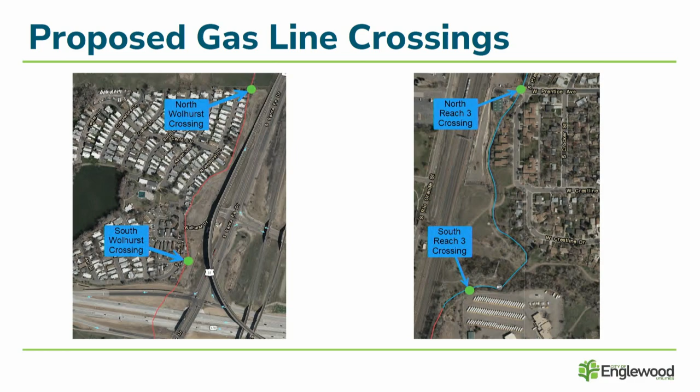These are in support of the City Ditch piping project, and we actually asked Xcel Energy to relocate these 2 gas lines in order for us to be able to install the City Ditch pipeline in Reach 3, which is in the City of Littleton. With crossings of the City Ditch, there are 2 types of agreements that we require. The first is a crossing agreement, which defines the terms and conditions associated with the crossing. The second is a temporary construction easement, which allows Xcel Energy and their contractor to access our existing City Ditch easement in order to install the new gas lines. For these crossings, Xcel Energy will maintain our required 1.5 feet minimum vertical separation between their new lines and the City Ditch, and they will also notify us prior to construction so that we can inspect the work as needed.

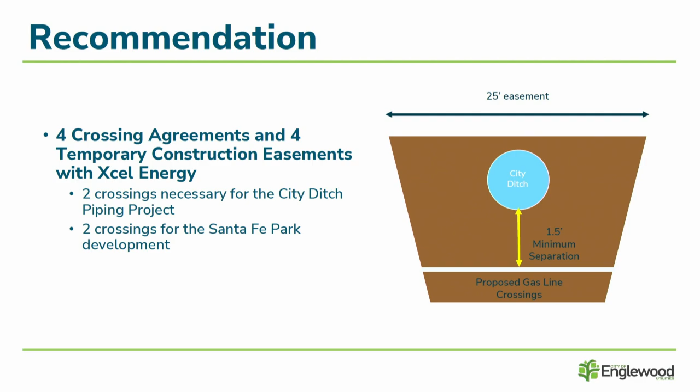Anybody have any questions? Doesn't sound like it. And yes, Stephanie, there's nothing unique about these particular easements, correct? No, these are very similar to crossings that you guys have seen in the past.

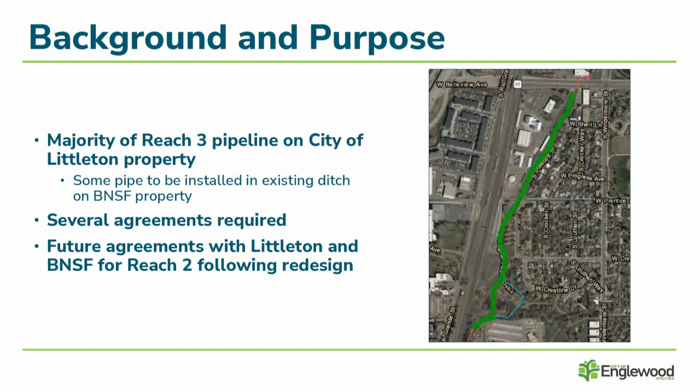There are 2 easement agreements that are proposed with the City of Littleton. The first is a temporary construction easement. This would be effective only during construction and grants Englewood and our contractor access through Littleton property and on Littleton property for construction, and also gives us a large area that we can utilize for staging of equipment and materials.

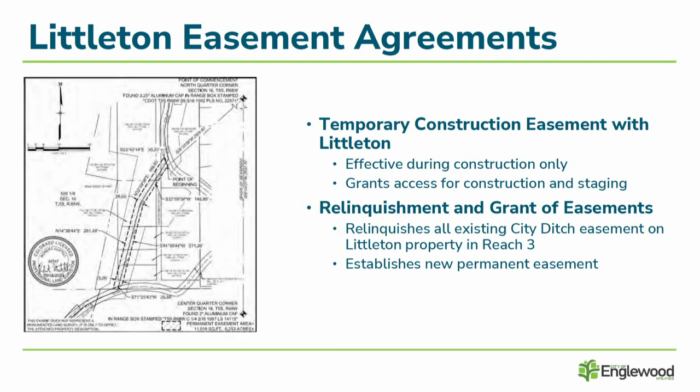The next agreement is a relinquishment and grant of easements. This relinquishes all of our existing City Ditch easement on Littleton property in Reach 3, and also establishes our new permanent easement for the new proposed pipeline location through this area on Littleton property.

Other agreements with the City of Littleton include an intergovernmental agreement, effective during construction only. It includes terms for a tree mitigation fee of $216,500, which Englewood would pay to the City of Littleton because we'll be removing a lot of trees during construction.

In order to install our new pipeline, City of Littleton also requested that we stabilize the existing City Ditch bank where we will no longer be using that existing open channel. This is adjacent to private properties, and the purpose is to stabilize the bank and protect those adjacent properties.

Littleton has also requested that we remove the existing overhead flume that conveys water over Slaughterhouse Gulch, and they want us to preserve a section of it that the City of Littleton wants to use to commemorate the history of City Ditch.

The last agreement with the City of Littleton is a quitclaim deed, which releases all infrastructure and responsibilities to the City of Littleton in this area of the existing City Ditch that we will no longer be using. This would be effective after construction, once we're utilizing our new pipeline and no longer need the old City Ditch.

In order to construct our pipeline within BNSF property, and also to go through BNSF property to install a pipeline to the north, we are requesting a temporary occupancy permit with BNSF. This will grant us the access we need for construction. It also includes insurance requirements and several fees, including a license fee, flagging services, railroad protective liability insurance, and an inspector coordinator. These fees are standard for this type of permit and work.

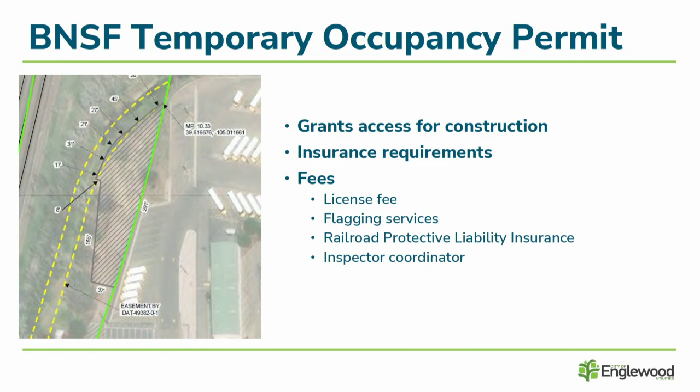Does anybody have any questions?

This is Sarah Stone, Deputy Director for Business Solutions and Engineering. I want to provide a quick comment before we open it for questions. Two Tuesdays ago, on May 27th, Stephanie gave a similar presentation to the Littleton City Council during their study session, to review the agreements and get their understanding of the construction that's going to be within the City of Littleton and what each of those agreements meant for the city. So I want to mention that Littleton is prepared to take these agreements in July to their City Council.

Can I ask a question? My question is, the part of the ditch that we're giving a quitclaim deed to Littleton for, is that in both Reach 3 and Reach 4? So Reach 4 is within the City of Englewood, so we're not giving Littleton anything in that area. But Reach 3, that's what it involves, yes.

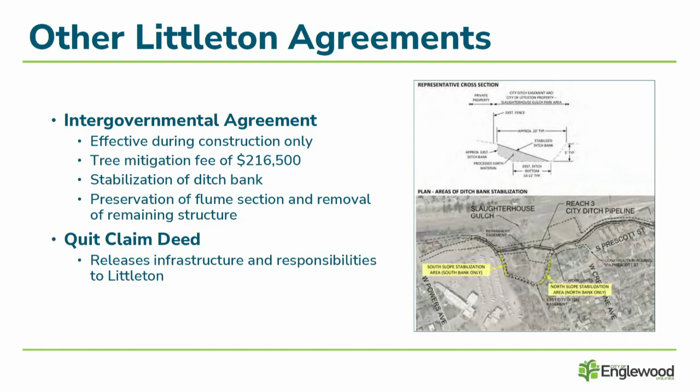They wanted to maintain that for historical purposes, is that correct? That is their plan right now. I think they're still discussing with their city council the long-term plans for it, but as of right now, it will be left open channel so that it can commemorate the history of the ditch.

Okay, thank you. And this is the same overhead flume that is in such bad condition that we'll be discussing later on, correct? Different overhead flumes. We actually have several overhead flumes for the city ditch. There's one in Reach 1 that we'll be discussing later. There's one in Reach 2, but we're not discussing Reach 2 in this meeting. That will be a future meeting as we're working on a redesign for that.

Reach 3, this is the overhead flume over Slaughterhouse Gulch Park, and that's the one that Littleton wants us to demolish but give them a piece. And then there's also an overhead flume over Big Dry Creek, just over here in Belleview Park, and that one will be discussed with the construction contract, which is the next agenda item.

And there has been some discussion that these flumes are in really bad shape. These flumes are actually in functional shape. What we've been balancing is the investment in the flumes knowing that they were going to go away, so we don't want to put too much money into them. However, Littleton did an inspection about a year ago. They did find an area of scour on one of the foundation points where the stream underneath had eroded around the foundation. Once we found that, we immediately fixed it.

5C. This next item is for the city ditch piping project construction, reaches 3 and 4. As we've discussed with Water Sewer Board before, we are working on the city ditch piping project, where our goal is to have a completely piped city ditch between Chatfield Reservoir and the Allen Water Treatment Plant. Through piping the open channel sections, the ultimate goal is to improve the taste, odor, and hardness of our water. Other improvements include sustainability, resiliency, and safety for the ditch, and an overall reduced capital investment for the utility by piping city ditch and bringing in better raw water quality from Chatfield Reservoir rather than taking as much water from our Union Avenue pump station in the South Platte River.

Jacobs has been performing the engineering design for this project over the past few years, and they completed the design for reaches 3 and 4 early this year. Soon after that, in February of this year, we released an RFP to bring in a contractor for reaches 3 and 4 construction. Reach 2, as I mentioned, is currently under redesign. The reason for that is BNSF declined to give us a permanent easement for our initial proposed pipeline alignment through Reach 2, so we're working on redesigning that section so we'll put the pipe in a different spot, or in our existing easement.

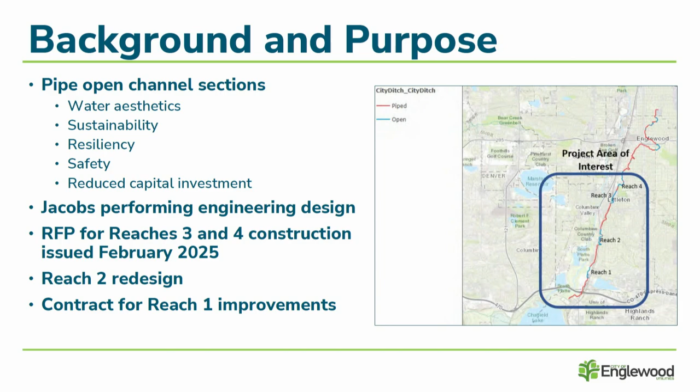The scope of work under this construction contract includes the piping for reaches 3 and 4. It also includes several supplemental items. These include cleaning existing pipe sections of the city ditch that have significant debris and sediment buildup, adding access manholes to another section of the city ditch where right now we're not able to inspect that section of the ditch because we're not able to access it. There's not enough manholes and we can't send a camera through. We also want to include in this construction contract structural improvements to the flume that goes over Big Dry Creek through Bellevue, also in Belleview Park, Reach 4. Those structural improvements came out of a structural evaluation that was completed by Jacobs.

Through this project, we will also be eliminating a stormwater inlet that currently conveys stormwater into the city ditch very close to the Allen Water Treatment Plant. So this will improve the water that we're bringing to our water treatment plant. By rerouting that stormwater, we'll also be reinforcing an existing stormwater channel to ensure it can take those additional flows. Per City of Littleton's request, we are also including the Slaughterhouse Gulch area slope stabilization and the Slaughterhouse Gulch flume demolition, as we just discussed.

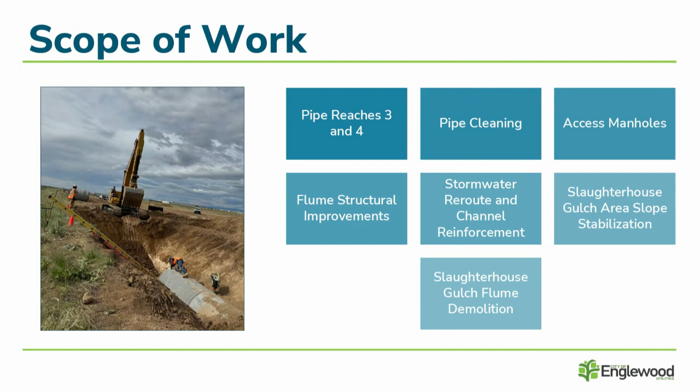For this project, we were originally proposing to execute it with a construction manager general contractor, and that was Reynolds Construction. We were working with them through the design phase and initially planned to move forward into construction with them.

Reynolds' price was for a 48-inch pipe, which is actually smaller than what we want to do for this project. We had reduced the pipe size when working with Reynolds in order to save costs. However, one of the supplemental items we included in our RFP was a 60-inch pipe or equivalent, which is the ideal pipe size to convey the flows we want through this new piped city ditch. We're able to include that in the proposed contract with HEI for significantly less than Reynolds, and their price also includes supplemental services.

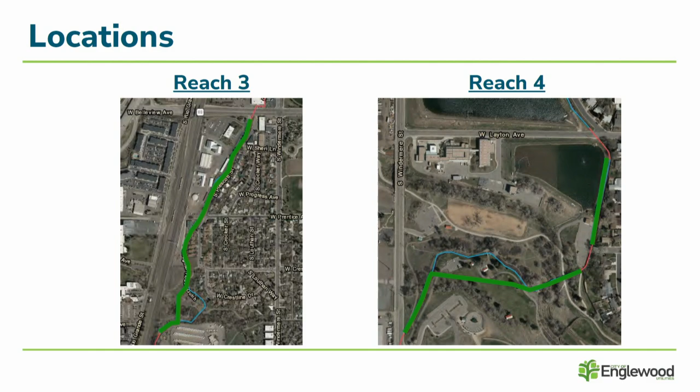So we do plan to pipe that section of ditch. However, that is also where the existing stormwater inlet goes into the ditch. So we'll be piping that area, but we're going to try to hug as close to our reservoir as we can, so that we leave room to keep some of that existing channel open to convey stormwater up to Layton Avenue. So the existing city ditch as it flows now is not going to continue, but there will still be some channel there, at least in the short term, to convey the stormwater.

I think the goal here is, from a stormwater perspective, as stormwater flows into irrigation ditches, from a design perspective you have to assume the ditch doesn't exist, because what you're assuming is the ditch is full and so it can't accommodate more water. What we're doing is putting that pipe in, but we're going to leave the ditch there so that it can still convey the stormwater away.

We don't want to make things worse. We think we'll make them slightly better. There's a larger stormwater challenge in that area that has been there for years and years and years. Our goal is to make it incrementally better, but not necessarily address the full stormwater challenges there as part of this project.

The other piece that I've talked to at least one of the neighbors about is that informal trail that runs along the fence. That's essentially where the pipe is going to go, is where that informal trail is. And then we're going to move our fence such that the pipe is within our fenced area. So that informal trail will actually end up going away.

Item 5D. Okay, last one you'll hear from me on. So this is for our City Ditch Reach 1 improvements. City Ditch Reach 1 is located in the city of Littleton, southwest of Santa Fe and Mineral.

Majority of the ditch in this area has already been piped by developers, but there are a few remaining open channel sections. That includes a forebay area adjacent to our McClellan pump station, an overhead flume that conveys water over Dad Clark Gulch, an abandoned Parshall flume that we no longer use for measurement but do use to convey water through, and a box channel installed by one of the developers, but the top of that box channel is an open grate and isn't fully enclosed.

In addition, we completed a structural evaluation on the overhead flume over Dad Clark Gulch in this area, and there are also several structural improvements that are necessary on it.

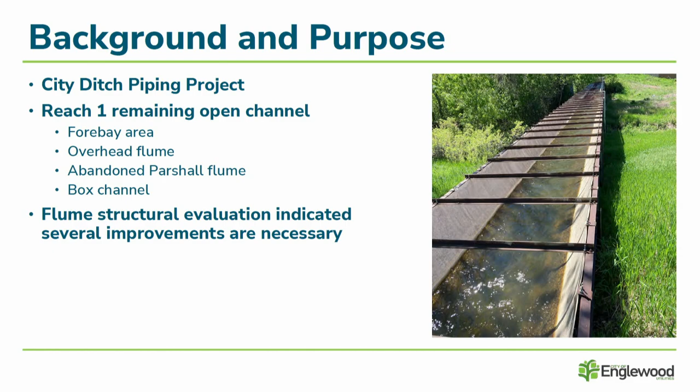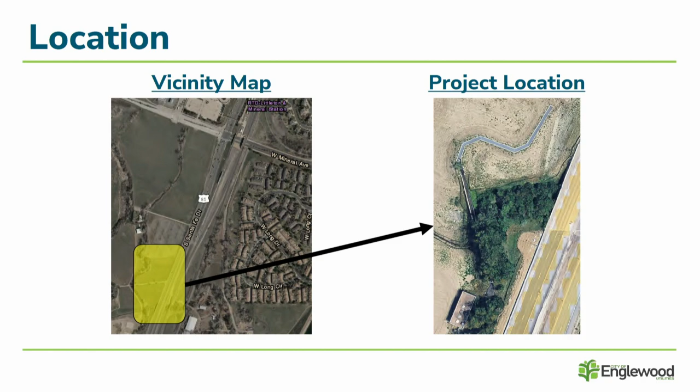The proposed scope of work for this contract includes a spray-on liner for the flume, which will eliminate an existing leak from the flume. We are currently experiencing water loss through that. Also structural improvements as identified through that structural evaluation that was completed, and enclosing all remaining open channel sections of Reach 1, which will complete and enclose Reach 1.

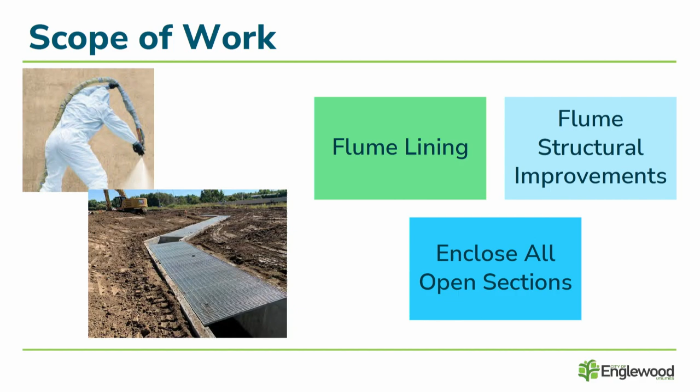When coordinating with Reynolds Construction earlier on in this project, we also received a quote from them for work on Reach 1. That was approximately $400,000 and did not include the structural repairs, as we hadn't completed that structural evaluation yet at that time. We are proposing a contract with QP Services for this work, and including the structural repairs, that's about $230,000.

QP Services is a pre-qualified contractor with the city. We have other existing contracts with QP Services, and they've completed quality work for us. They also have the specialized expertise needed for this type of work in Reach 1. I think that's one of the main reasons their cost is significantly lower than Reynolds Construction. I believe Reynolds Construction was going to subcontract out a lot of this work to a more specialized firm like QP Services. That's why they were significantly higher.

We're proposing a contract amount of $229,880, a 10% staff managed contingency, for a total project authorization of $252,868.

Any questions? All right, can I get a motion for item 5D as written?

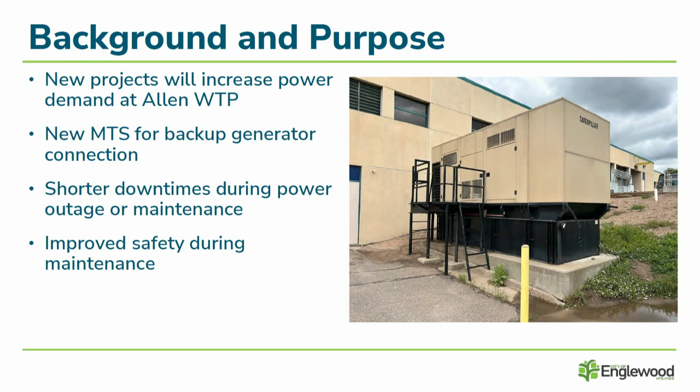We actually recently completed a construction project which would have been much simpler had we had a manual transfer switch.

So the timeline for this project: the switchgear has about a 15-month lead time. If the board recommends approval tonight, we would be on track for July procurement. The equipment would arrive in October of next year, and we would begin installation and construction, completing by the end of 2026.

Scope of work includes the furnish and installation of the new transfer switch, installing a new concrete reinforced pad as a base, installing new underground electrical conduit and duct bank, and tying into the existing switchgear building, which is the larger white building on the right. We will supply a roll-up generator during construction to support the project, and handle startup and commissioning.

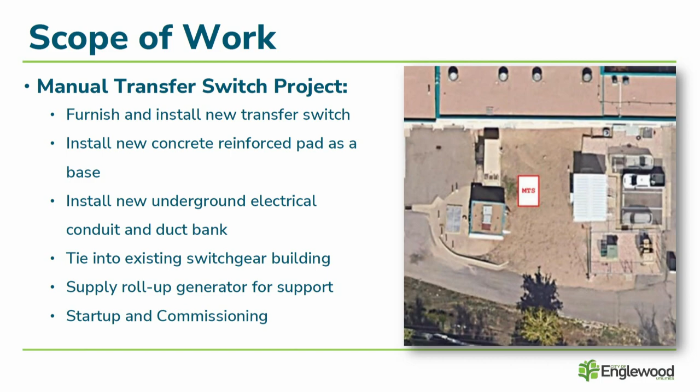So here's a breakdown of the costs, with the total cost being $666,508.

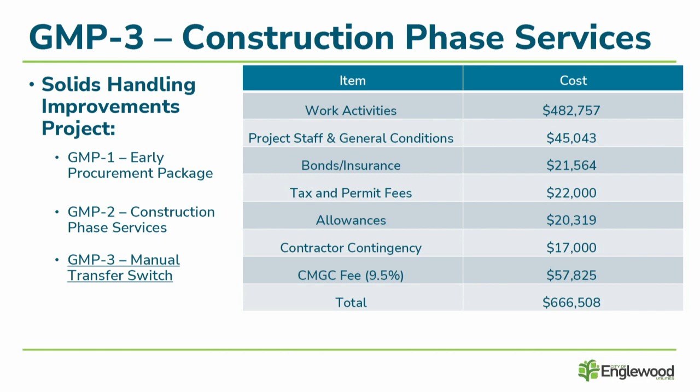Our recommendation is approval of a modification to add GMP3 to the existing CMGC agreement: $666,508 plus a 5% staff managed contingency, for a total project authorization of $699,833.

Questions? Chair, if I may: this is a contract where we are still continuing to use CMGC, the other contracting methodology. That is one where we work with the contractor through design. We select them based on their qualifications, we work with them through design, and we work with an owner's advisor to help ensure that the pricing we're getting is market competitive. Then we work through a process called GMPs, guaranteed maximum price.

One of the reasons we do it this way is because there are long lead items and phasing. If you're doing a design-bid-build project, you wait all the way until everything is done, issue it for bid, and then start the process of procuring everything. This allows us, through GMP1 and GMP2, to do some of that work incrementally as we move forward.

So I just wanted to illustrate to the board that we use these different contracting methodologies based on what we think drives the best value for the city as a whole, and we ensure that the pricing we receive, whether from a hard bid to the street or through a GMP process utilizing an owner's advisor to verify the pricing, is how we ensure we get that best value.

As we've talked about many times before, the water fund serves about 34,000 residents and 2,100 businesses. You can see the service area there, it extends beyond the city of Englewood. We've got some extraterritorial areas. So we have the Allen plant, we have some pump stations, and a lot of pipes and valves and things like that. We essentially provide drinking water services and wastewater collection, and that's what we're covering today.

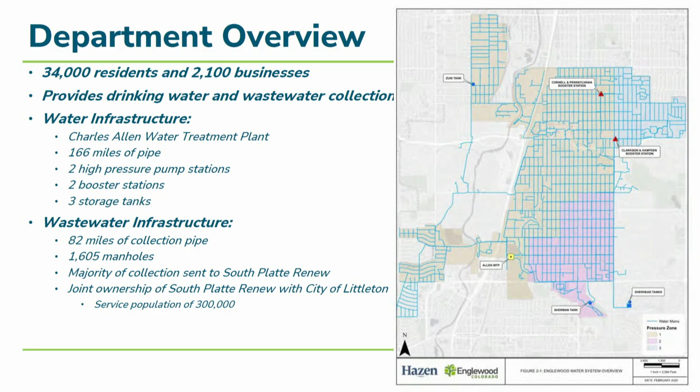On the sewer fund, as you all know, South Platte Renew, the proportionate share that is Englewood's responsibility of South Platte Renew, comes through the sewer enterprise fund.

Overall, our strategy, which we've gone through over the past few years, is modernization of the utility, so that reinvestment, fixing things. When you look back at what Stephanie and Adam have talked about earlier today, there's a lot of investment. We conceptually came up with the problems, then we've done the designs, and now we're actually in the construction phase, and there's a lot of these improvements. If you look over the last two years of this board, there's a lot of construction and investment occurring. So that's that modernization aspect.

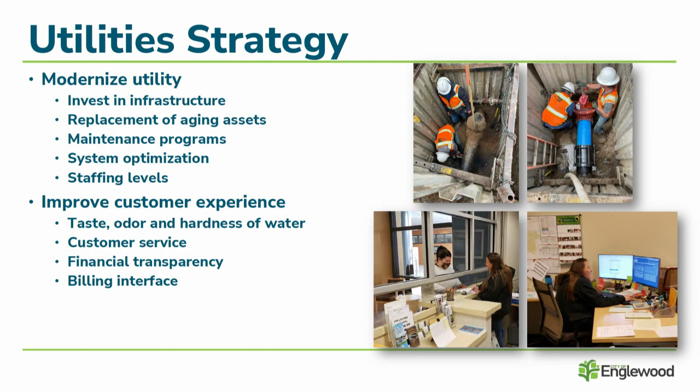And with that modernization comes a focus on improving what is ultimately the customer experience, and most important is taste, odor, and hardness, which we continue to make incremental improvements on, and we continue to see better and better feedback. We are not there yet, but these projects like enclosing City Ditch, which we made a huge step forward on today and when we go to council, help us get there. So that's really our two main strategic approach priorities.

Organizationally, we essentially have 63 FTEs. You can see how they break down: there's 8.5 in engineering, 12.5 in business solutions, and 42 in operations and maintenance. I split my time 50% as the director of the utility and 50% as the director of South Platte Renew.

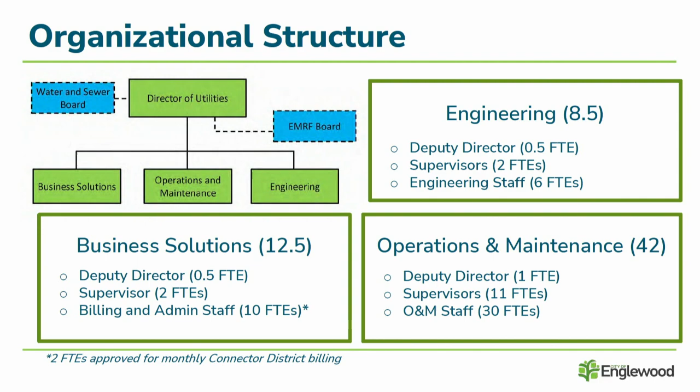Sarah and I also share the responsibility of leading the Englewood McClellan Reservoir Foundation Board. That's a function of the Director of Utilities, and so we work with that property and establish those long-term leases to provide revenue to the general fund for the city of Englewood.

Generally, our strategic plan connection is to infrastructure and transportation, safety because of safe drinking water, sustainability, community well-being because it is water, and then overall governance from making sure that we have long-term financial plans and long-term financial strategy that is sustainable for our community.

The water and sewer utility focus is taste, odor, and hardness. Lead service lines are being replaced at a rapid clip right now. We're about a year into that project, and we just crossed over the 1,000 service line replaced threshold. We anticipate somewhere around 2,800 total, so given their production rate, we're thinking as soon as 18 months we'll be complete, and that issue for our system will be gone. Back in 2020, we knew we had the issue but had no way to fund it, so to be here 5 years later and potentially having that completely resolved in our system is important.

Some of the major program updates, besides lead reduction, include City Ditch, which we've talked about, and one of the most important resiliency projects that we have, which will go to construction this fall, is the Denver Water Interconnects. That provides us that backup resiliency that has not been there for a few decades.

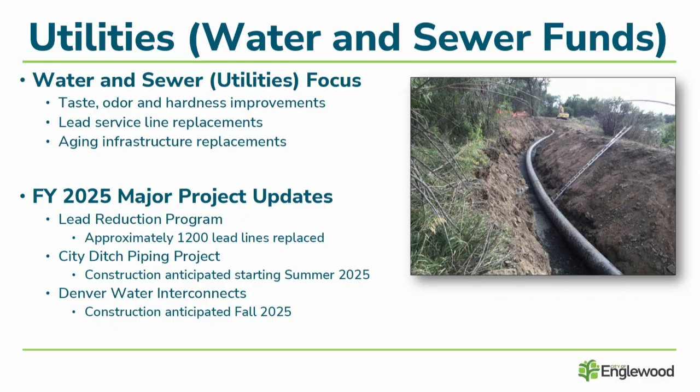So we'll get into the water fund. The total budget request for the water fund: from 2025, the operations request is just over 17 million, and we go down slightly to 16 million, so we're down by about 1.2 million. The capital again continues to go down a little bit. Overall, we move from 53 million down to 51 million, which is about a 5% decrease.

Now a lot of what you'll see in these numbers, when we get to what we call the mountain graph, is that we're in that peak of investment, and a lot of that comes from the debt we issued through WIFIA and the state revolving fund. We're infusing that money into the systems, improving the systems with these projects, and ultimately you'll see these total budgets come down substantially because those capital numbers will come down.

In 2024, you can see generally how we did. This is funds we had originally anticipated in the budget: 47.5 million. We spent about 32.5 million, which means that 15 million went back to the water fund. So it doesn't go anywhere else - it's not lost, it just goes back to the fund balance of the water fund, or we don't pull as much debt. What that really does is push out the timing of the execution of the projects we have allocated for those funding mechanisms.

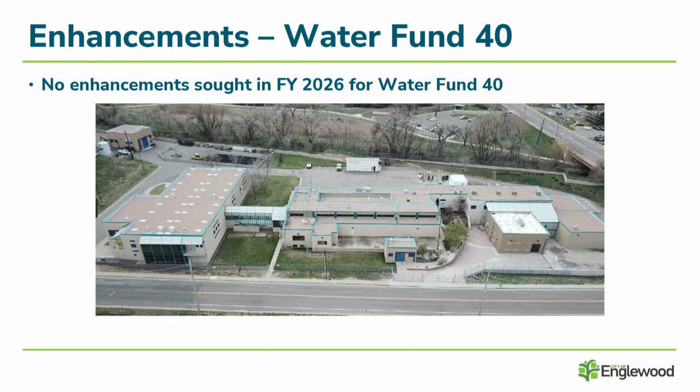There's no enhancements scheduled or anticipated for the water fund in 2026. So basically, everything is what we've already outlined in plan and in master plans, and staffing levels are where we think they should be. Our revenue continues to stick to the financial model, which calls for a 4.5% increase per year. We talked to the board about this last month when we went through in detail the financial models and how these numbers all interact to ensure that we're executing the appropriate amount of investment and ongoing operation and maintenance while not creating rate shock.

So what does 4.5% mean to the typical user? Basically, to the typical user, it means about $1.08 per month increase to their water bill, and that's for a typical user in the city of Englewood.

Our connection fees follow the ENR Engineering News Record Construction Cost Index. This is again part of our financial models in terms of how we make sure we're keeping up with connection fees, and our projected annual revenue is about $38,000 from new connections onto the system. Capital investment fee stays flat this year - if you recall, that goes up by $1 every other year in our model, and this is one of those years it doesn't go up. Then the drinking water loan fee, which was approved last year, will be implemented late this year. That one stays flat at $5 through the life of the fee, which is essentially 30 years, so it's not anticipated to increase beyond $5 at any point in the future.

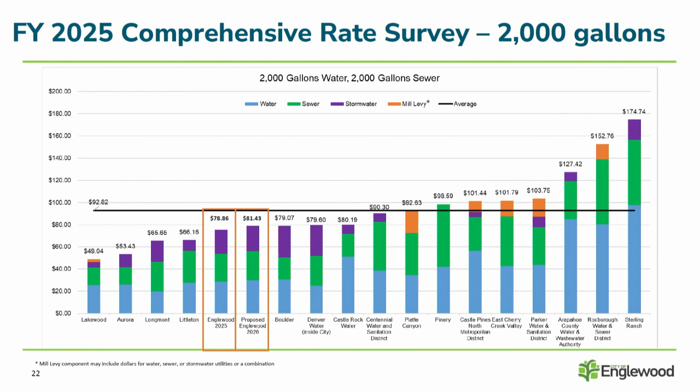So we want to provide a broad comparison. If you use less water, it becomes a little bit more. We move a little bit farther up, but we're still in that lower end, and we're still well under the average. If you use a lot of water, we become the cheapest of the entities.

So this is something that is involved with our rate structure that we need to fix, which is that declining block rate structure, which we anticipate addressing in a couple of years. We want to give our customers a bit of a break from changing all the rates based on the last year and some of the work that we've had a challenge with.

But you can see generally, as we look at this from a comparison to the rest of the metro area, we are at the bottom end, and we still remain highly affordable for water, sewer, and storm services. And this is the new information proposed based on the proposed rate increases that we're proposing tonight. So that is it for the water fund. Any questions on the water fund?

Do we intend to spend all of the WIFIA money? Right now, our intention is to spend all the WIFIA. Yes, it is to intend that. We are intending to spend that. The benefit we have is we have more time to spend that money.

The interest rate on the water fund, I believe, is 2.95%. So it's a really good interest rate. Like I said, it sits out there right now, and if we don't draw it until 2028, we're not paying interest, and it's got a 35-year payback. And so it's a really good funding mechanism. Okay, thank you. I appreciate that.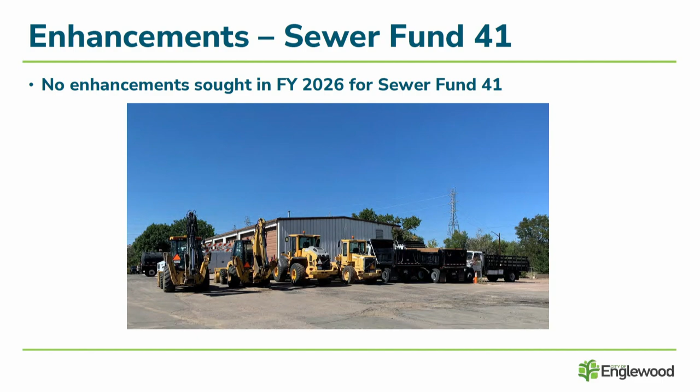No enhancements. We think, again, from a staffing perspective, we're good.

Revenue, you can see on the revenue side, the rates generally about $1.08, $1.10 typical increase per month in terms of cost. What it does from a projected revenue perspective - remember, this is not just the people inside the city. This is inside the city plus all the connector districts, which come through the connector agreements with the City of Englewood. So the numbers look really big from the sewer fund perspective, but a way to right-size that to direct City of Englewood customers is to multiply that number by about 11 or 12%. So even though the projected revenue is about $1 million, it's generally probably about 110,000 to 120,000 from City of Englewood. The numbers do look big because with the agreements, we're serving upwards of 160,000 people, not 34.

Questions or comments on the sewer fund?

Keep rolling. Okay, South Platte Renew, we'll run through that quickly. We'll go into this in much more detail, we do this annually with the two councils at our joint council meeting that's in August. Anybody from the board is welcome to attend that as well.

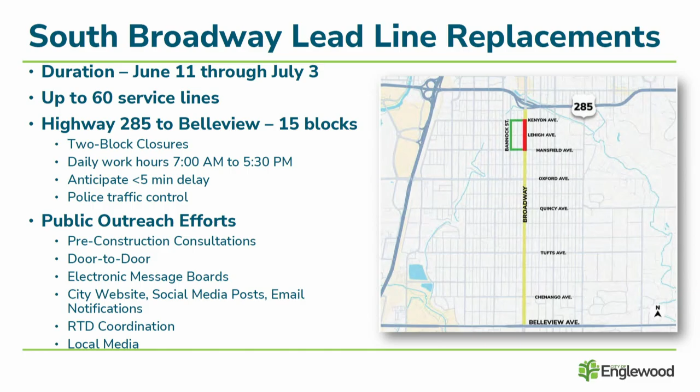Today, Peter actually gave an interview to Channel 9 asking about the impacts for these detours, and that will air tomorrow morning. So I'm happy to answer any questions. It'll be a great way to wake up tomorrow morning, hearing me talking about Broadway and lead service lines.

Chair, do you mind if I ask a question? Oh, please go ahead. Thank you. So is this work only happening on weekdays? Yes, only on weekdays. And will the lanes be fully open on weekends?

Yes, the lanes will be fully open on weekends. There'll be a lane each way. It depends on where they finish on a Friday. If they have cut holes for replacements to happen on Monday, there may be lanes closed in either direction for that 2-block extent.

I'm not sure if there's a good way to do this, but did we consult with businesses that see most of their business on specific days, like weekends or Thursdays and Fridays? Did we consult with them in terms of what would have less impact to their business doing that stretch of block? We did that as much as we could, because we're trying to keep it to 2 blocks and only closing it down for the replacements.

I failed to mention that we will also be doing permanent patches along Broadway. We will not delay in getting those permanent patches done. So there'll be the two-block closures, and then the contractor will come back towards the end of this time frame to do those permanent patches. We're doing the 2-block closures again for 1 day, just to get those patches complete.